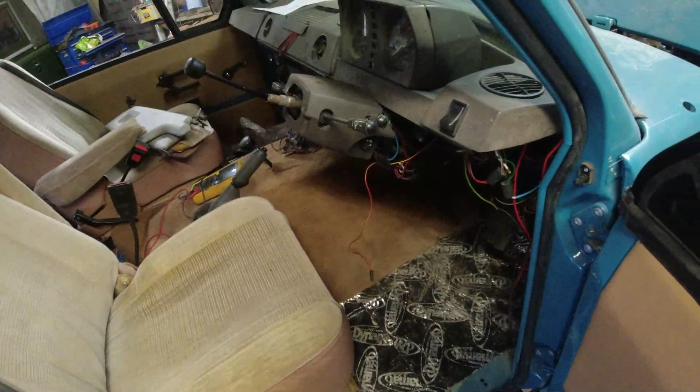Oh my goodness. Right, we've got the interior lights working. Push the plunger in, woo, and they're off and they're on again. And they also operate from the switch down here.

All the wiring around the centre console is now finished. I still need to wire in - which is what that bundle of wires is there - the heated rear window. I can't figure out the park for the rear wiper. I will do, it will happen.

I've just cleared the floor up because we're expecting biblical weather tonight, so I'm just clearing all the cardboard and stuff off the floor because I don't want to come in to a great mess tomorrow.

This is all stuff that's going to go back into Bob, so I'll pop it in Bob for now. Let's pop that over there. Carpets look nice though, good match to the seats. Look alright those. Shame these seats aren't still the gold colour. They'll do if you brush them a little bit. They need a damn good clean. I've got Monster Valet coming. Blue light over there is the USB charger adapter thing.

Yes, my list is shortening and growing at the same time. So we're crossing things off - quite a few things are being crossed off. Still need to do the tailgate seal, it's not working properly. Sill tread plates, usual stuff.

And then, of course, the list grew into this page yesterday and today. I was saying no, that was Monday. I just had to sort the pedal rubbers out for the MOT, I suddenly realised. Fuel tank still not working. Still need to just go through and do the final tune on the engine.

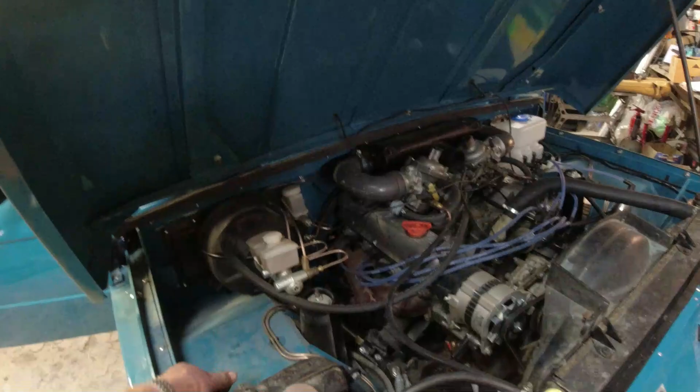It's this phase of the project that is just so massively time consuming. I mean, okay, I've had 3.5 days off this week to do my dad's car, and that was time consuming. Prepping one of these things, I tell you, it's not a small job.

Yes, I've still got to go and polish this thing yet. I haven't polished it yet. I might need to wash it first. Anyway, it's enjoying a bit of solo time in the workshop. My dad's car's coming back in there again tomorrow, so it'll be a bit crowded, which is why I want to try and get some of this interior finished, so there's less crap really around the floor, and the car's in a better state of completeness.

It's Friday again. Bob's being picked up by his owner on Wednesday. Got a little bit of work to do, but not much. My dad's car's coming back, fresh from paint. But we're here to talk about Bob.

So I've got all the rear seats in, I've got all of the dusty - I can't open it because I've locked it. Where's the keys gone? It's not a good start really, is it, Richard? Wrong keys, what an absolute buffoon. Try that again now we've got the keys. What an anus. You can't make this shit up, Richard. You really can't. You're rubbish at this.

Which way? There we are. That way to open it.

So you can see carpet on the rear arches. Look at that, that's nice, isn't it? All fitted in, carpet underneath the rear seats, all tidied up. Still relative chaos in the back of the car here. I've got the original metal sliders and metal channels that go on there.

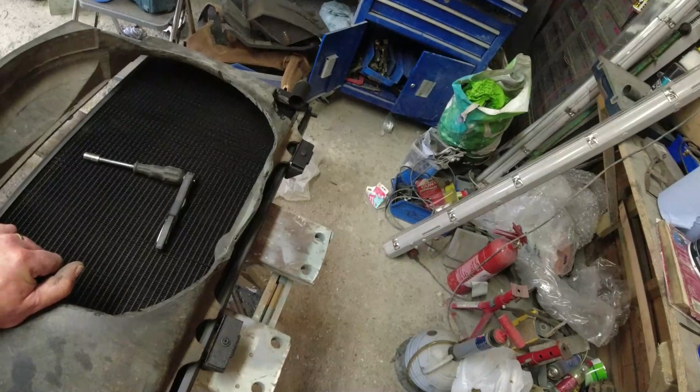And the original radiator, I have been called - Frank over at Viking Radiators has done an absolute sterling job again for me. He's done a couple of radiators for me before on Range Rovers. He did the radiator in Alan, and now he's done the radiator in Bob.

Project names, of course. This is an original metal fan cowl, but it was already broken at the bottom here. This is one that came off Project Red Shed, and the owner rejected that. So what I've basically done is the cowl is largely intact around the sides and around the top, which is really where you want it.

It was broken at the bottom for now, so I've just tidied it up along the bottom edges there, and you can't actually get the fan, the viscous fan, in because it's slightly larger diameter than the metal fan. So I've had to just clear that, and now the fan clears inside here, which is good news.

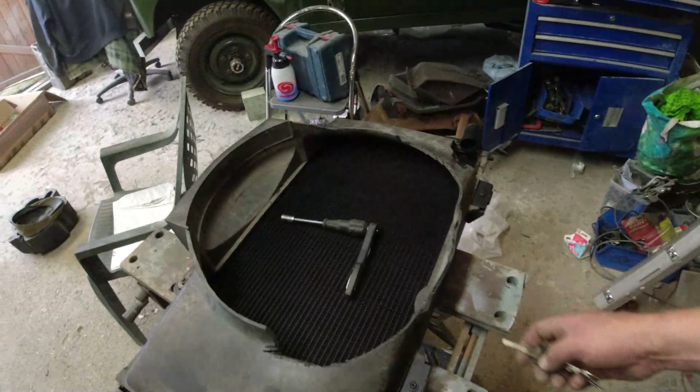Now all I'm going to really do is pop this rad into the motor.

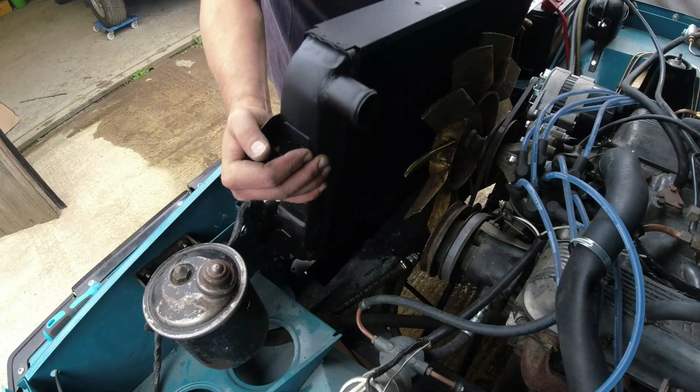It amuses me no end, but I have to edit out profanity as I'm editing the videos. It's not a laborious process editing these videos out, but it does brighten my day up a little bit when I have to edit out extreme profanity. It just makes me giggle. Good Lord, Richard, did you really say that?

Get some satin black up there, aren't I? That's silly, Richard, how I managed that.

That's good, right now, bottom hose. Does it fit? Does it reach? It does reach, it does reach.

Good effort, that. This is the radiator that someone had angle-ground the bottom pipe off, and Frank has welded a stub onto it - well, not welded, soldered a stub onto it at right angles. That appears to have done the trick. Thank you, Frank.

Right, that goes there. Right, let's go and get the cowl.

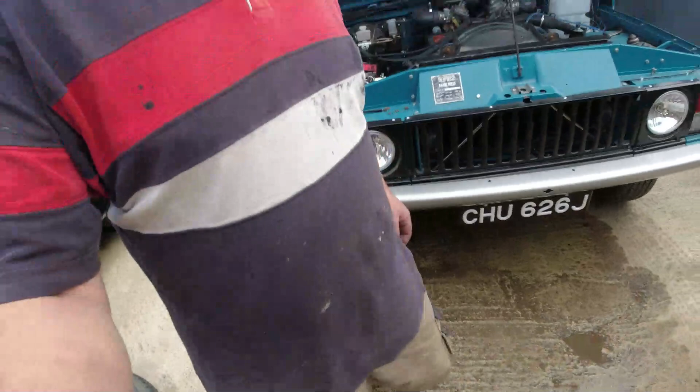So that's there. Right, let me now, I need to go and get the two fixings of this. Here.

I'm going to do that while it's sitting there actually. I'm going to get these two mountings off the top here that go on the top of the radiator. That's what I'm going to do. And then I'll come back to you as I'm putting them on the other radiator.

Let's raise you up a little bit. You raise me up. No, it's not going to happen.

Looking forward to my gin. It is gin o'clock.

Right, that's in there. So what I do is I tighten this onto here.

Just go over with a rattle can, tidy up around the edges. Bit of satin black.

Right, the viscous fan's touching. So what do we need to do here? Probably undo this one here. Let's move that out of the way.

Now, that's good, like that. So what I'll do is tighten this one up. Water's now dripping down the back of my neck.

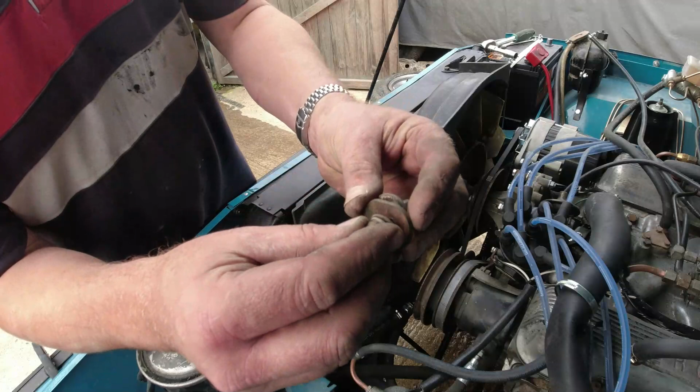That's weird. It's just come unbonded, it's not sheared. I think that might have been fixed at some point.

Right, let's go for a nut and bolt, it's going to be an easy solution. Straight through, nice big fat washer in between. This is how even a 2-minute bloody job can take half an hour. This is what happens, folks, I'm afraid. Pair of washers, pair of splitties, pair of bolts, UNC. Let's take this bastard off as well while we're here.

It's going to get wet in a minute.

It's a massive tool. I need to get a new rad cap for this thing, but this one seems to work, just doesn't look very pretty. Trouble is, the new one will be Chinesium, and this one will be kind of used old, very used old.

So I'll clean up the top with a bit of steel wool, it'll probably come up beautifully. Bit of steel wool.

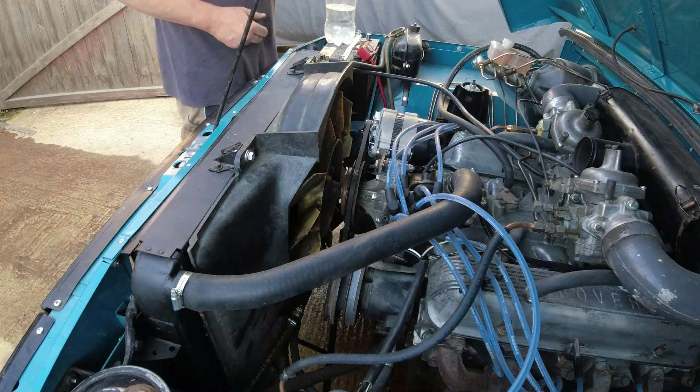Might be inclined to keep it actually. It's quite sweet that, certainly not going to get chucked in the bin. There we are, very nice. Patina - you can't put a price on it.

Right then, keys, let's start up. Connect the battery.

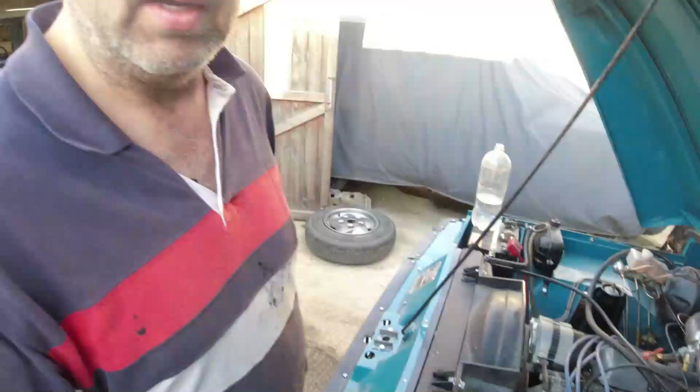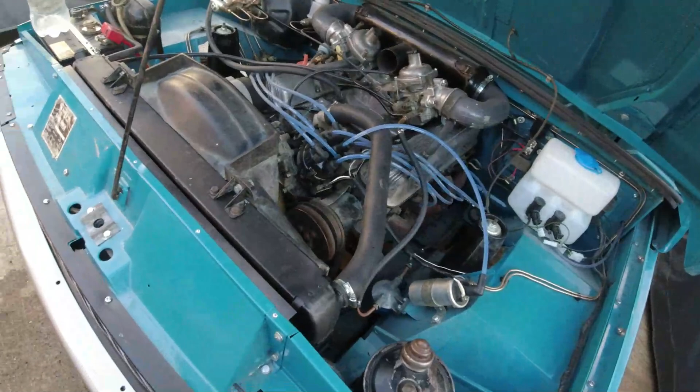Oh well, that's delighted me, misfire's back. That's good, that's good. I think I'm going to change plugs, actually. I'm not going to grab hold of these leads just yet. I'll put some coolant in there.

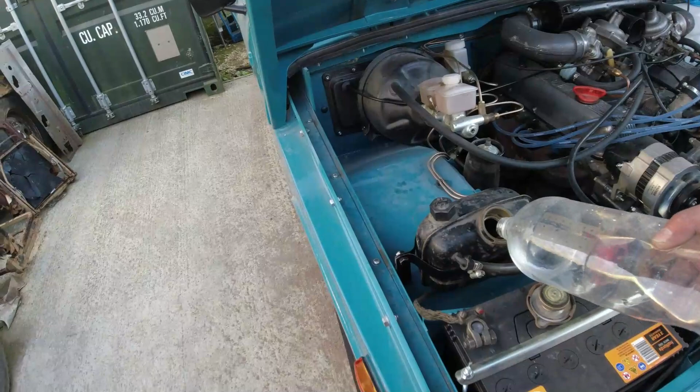That's in there. Right, let's go on. Let me turn off and just double check these two leads.

Like I said, I walked back towards the car and it's running beautiful. Yeah, front cylinder's now firing. I'm going to change the plugs on the front - I'm actually going to change all the plugs. That's now working. I think the plugs are the wrong spec.

Sunday, not hungover. Right, I'm going to try and get to the bottom of this misfire issue. So, yeah, let's just walk through what I've been doing.

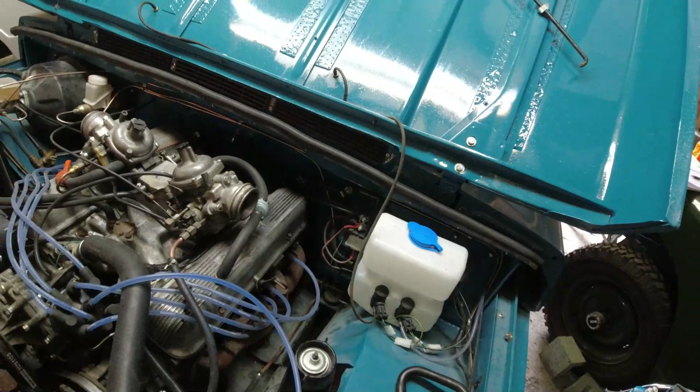In a nutshell, I've had all the plugs out, double-checked all the gaps on all the plugs. They are NGK BP6ESs, which is actually quite an old plug. So I've ordered a set of new plugs because I'm not convinced it isn't a plug issue.

Now, what I did notice was that yesterday when we had the misfire, the two front cylinders on each side were causing me difficulty, so I double-checked the carburetor distribution. As I understand it, each carburetor deals with the middle two cylinders on each side and the outside two cylinders on the opposing side. Which would make sense because this carburetor is dealing with these two and then it's got these branches going out to the outer two, and vice versa.

Some of the plugs were wet, some were coked up, and some were beautiful. So it's almost as if - I don't think it's leads. I've been through and double checked all the leads as you've seen in the previous video or earlier in this video. I'm losing track of my life.

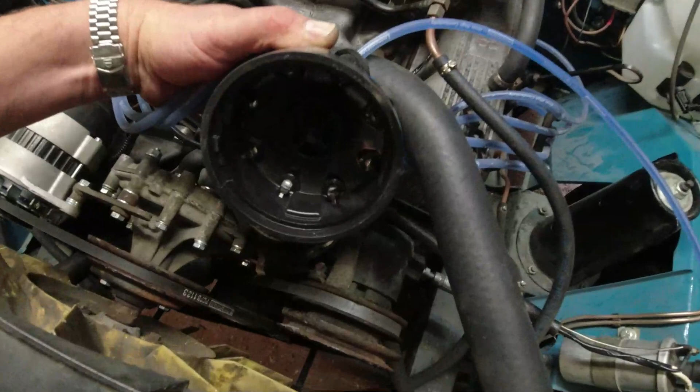Pretty sure it's not the distributor cap. I mean, the main thing we've got here is, there is some arcing going on in there. It's not the best, is it? This is a new cap and rotor as well.

Oh, that's odd. Right, a bit more investigation in here, I think. Let's turn you round.

Right, okay, so let's pull these leads off. I've got the screws to go in there. Now, the centre pin is good, but the problem I've got here is... oh, come along. There it comes.

Sometimes these rotors cause problems. This one, I think what I've actually just done here is I've lifted this off. It's actually quite a common fault, this, so it's probably worthwhile explaining what happens. When you lift the rotor up, what actually happens is you disconnect the mechanical advance, which is exactly what I've just done here.

So I'm kind of at a loss now. But here you can see on the tip of the rotor, I've got some burning, and on the inside of the cap there's quite a lot of carbon in here. I don't know why. That's weird, isn't it? Maybe it's not the plugs. Maybe I'm talking a load of bollocks.

Right, let's take you off there. Take you off there. Push you. Oh, for heaven's sake, what are you doing, Richard? I don't know what I'm doing. Anyone know what I'm doing? Can anyone help me with what I'm doing?

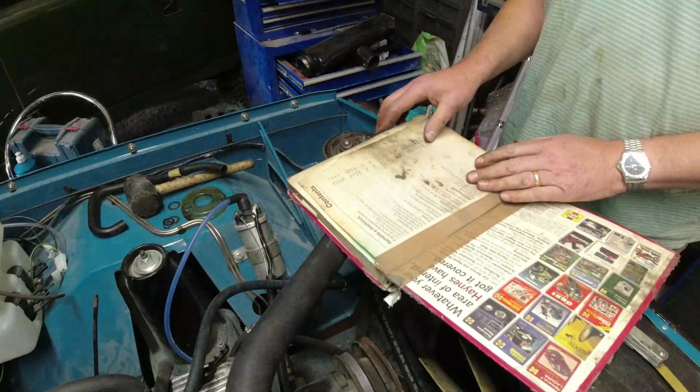And then I'll check the air gap. Now the air gap is actually defined in the manual, believe it or not. I think it is anyway, I've seen it somewhere. The Haynes Pack of Lies, chapter 13. 13 index, probably where that tab is there, isn't it? It is, okay, look at that.

Ignition. Conventional electronic ignition. Does it give me air gap? Pick up air gap. So 8 to 14 thou. That's 10 thou, okay.

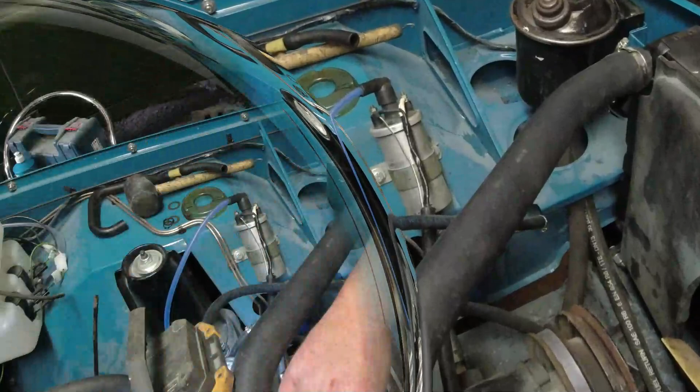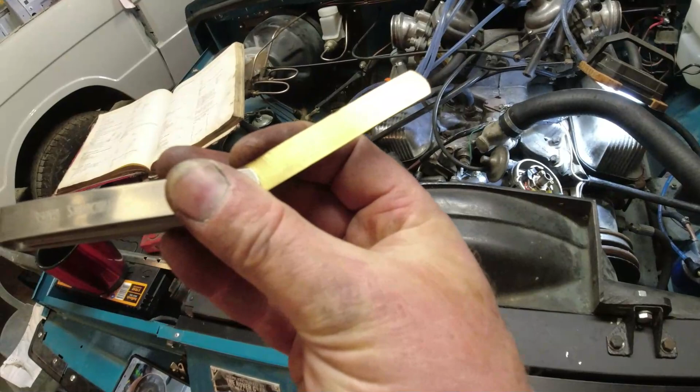So what I'm actually doing is I'm measuring between the tooth. Can you see? You can. Measuring between the tooth there and the pickup, and that's what I'm measuring in between. This goes in now, it didn't go in before. It now goes in. And that's a 10 thou, 0.25mm non-ferrous feeler gauge.

Pop that back over here. They're not for now, I picked them up earlier on. I'm driving home today and I'm going to be drinking them when I get home on a Sunday.

Right, having done that, again, I'm not happy with that, but tough. Right, let's see what happens next.

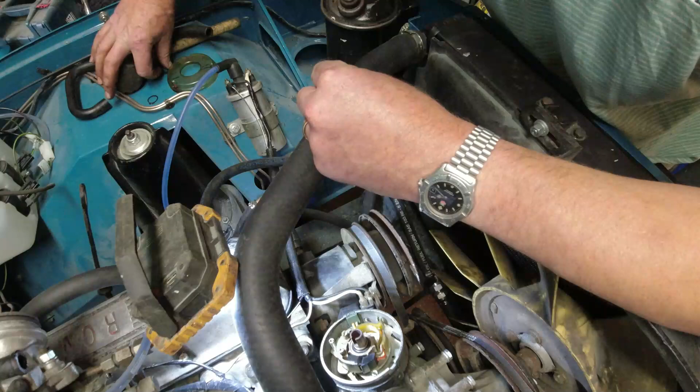So big old O-ring goes back over the top. And then I've got these 2 shims, one's a washer, one's a shim. Probably both shims. That goes on. That goes on. Bloody great big clip.

This is not a factory one, this one. This is a reproduction, whatever it is, because the factory one, the holes are far too small for my... bloody great big... I don't even know what I'm talking about anymore. Whatever these are, circlip pliers.

Has that actually gone into the groove? That's gone into the groove. Yes, it has gone into the groove. It's certainly down. I don't want this stuff flailing around, you see, if in the event that this clip comes out, stuff starts flailing around inside the distributor. It's going to be held in place by the rotor, but it's not going to make it very reliable, is it? Yes, it's definitely in the slot, I can feel it. Okay, so that's in the slot.

That's good. Then we put this base plate, and the words are, do not remove this cover. The distributor is factory set and requires no adjustment in service. Well, I'll tell you what, it fucking does. Air gap set, mechanical advance fixed.

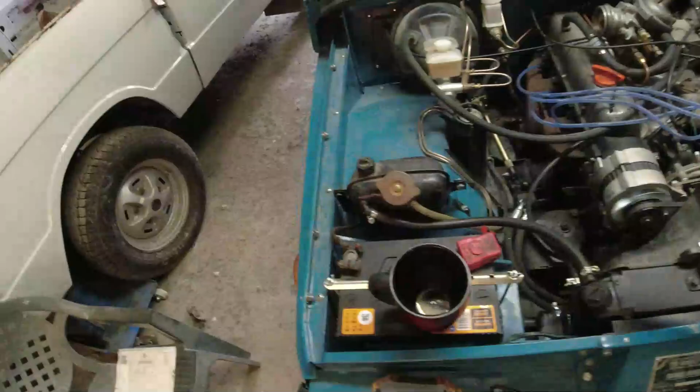When I pulled the plugs out of the injector, I put number 1 plug in number 7, I swapped them all around. Now the problem I've got is number 7 is not firing. The others are all firing. So 1 is working, 3 is working, 5 is working, 7 is not. I did exactly the same over here. Good job I've got these new plugs coming tomorrow.

2, 4, 6, 8's not working. Actually, 2... they're all sort of working on this side. I'm wondering if this is right.

So next thing I'm going to do is warm this thing through, and I'm going to give it a double check on the tune of the carburetors.

Bear in mind that was a cold start. Also good. Right, on with the screwdriver next. What basically it's doing now is lifting up the dashpot inside the carburetor. Just lift it the width, put that underneath the dashpot and turn it that way. That gives you enough of a lift. Basically, I want the revs just to drop very, very slightly, for the engine not to stall.

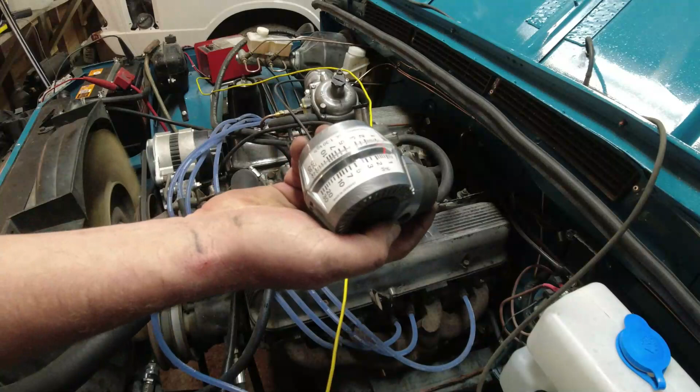I'm not changing any of that. That's good. Ow! Bonnet, not very friendly. Right, so start up again, and we'll just double check the airflow. Not a lot wrong with that, is there?

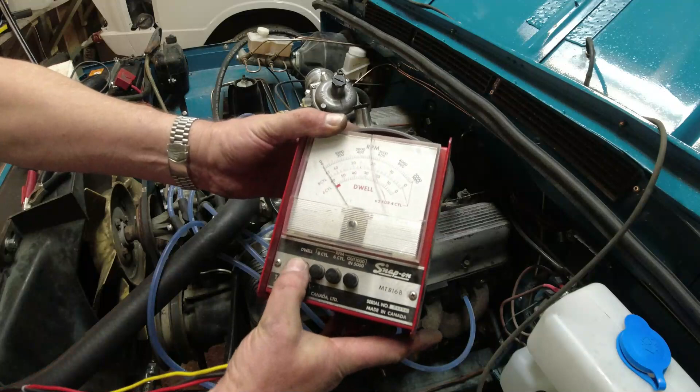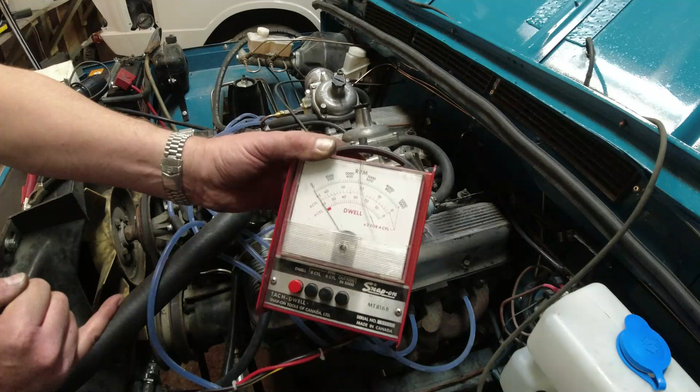Let's take this out, put this back in the container. Just in case you were wondering, this is my delightful box of tach-dwells. You set the dwell using that and 8 cylinders, okay, and then you've got the RPM. It's got a big scale and a small scale, so you can fine tune. Basically that will work on the big scale, the 5,000 scale, and then that will work on the 1,000 scale. I use this to set, when I've got points distributors, I use that to set the dwell as well. Very nice bit of kit, I picked it up off eBay for about 20 quid.

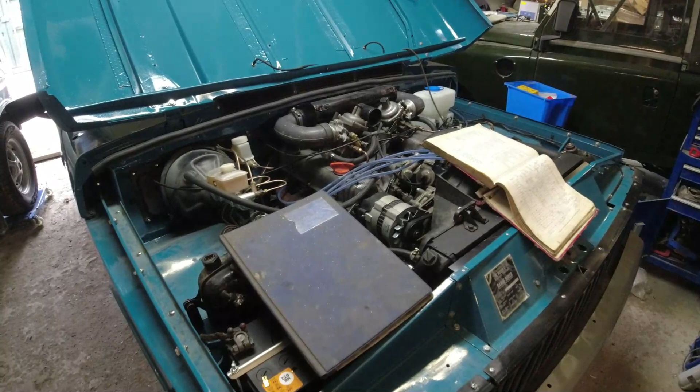Right, it's all back together again. I've had an interesting afternoon diagnosing some little electrical issues, things that aren't working. One of the things not working is the handbrake warning light. I'm pointing at the pressure warning switch, the differential switch, whatever it's called, the shuttle valve for the brake switch. Because you've got dual circuit brakes here, that switch sits in between the two circuits. It doesn't interfere with those circuits, but if the pressure disappears on one of those circuits, the shuttle will move, short out the cable, and light up the light on the dashboard. So that's the way that works.

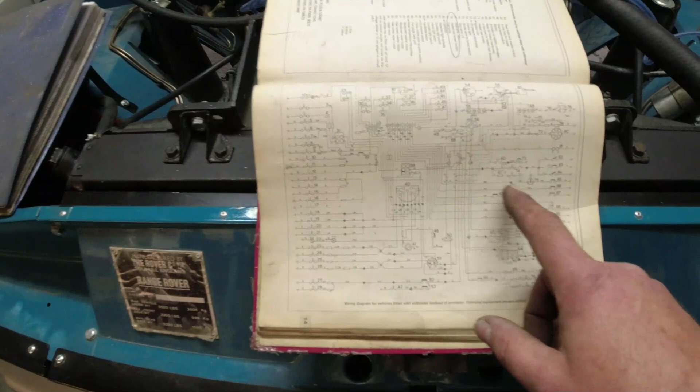Now, that little bastard is right there. Look at that, that little fella there. It's got basically 2 pins on the outside, which the 2 black and white wires go to, and then it earths through the handbrake warning switch. But it also earths through the switch. Check the switch. Switch works fine.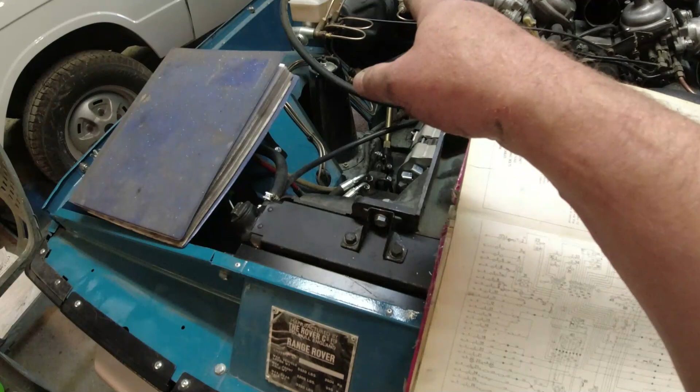Okay, check the cables. Cables work fine. Check the continuity for the big connector that's on the bulkhead up here. Works fine. Right, okay, let's just trace the black and white wire back.

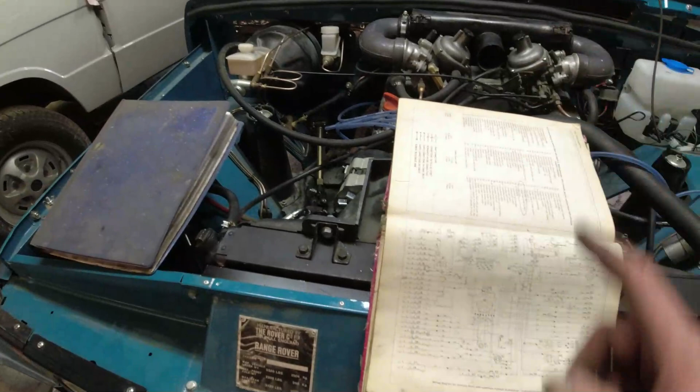Oh, it goes to the back of the instrument pod. So I need to get the instrument pod off anyway because the illumination lights aren't working on it. So I'll get that sorted out.

Then I started faffing around with an inline fuse by the fuse box. I can't be bothered to go around there and show you now, but it's a brown and white wire. I could spend all day going through the brown and white.

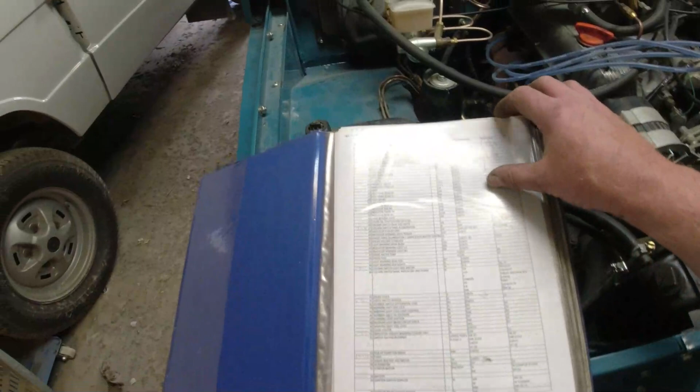So what I've done, years ago, I created a reference for every single circuit, what the source and destination was. Here we go, so we go down here and look for the source, brown and white. NW is what we're looking for.

Oh, there's one, pickup point for the radio. Let's go and have a quick look. Pickup point for the radio. Well, there's the pickup point for the radio there.

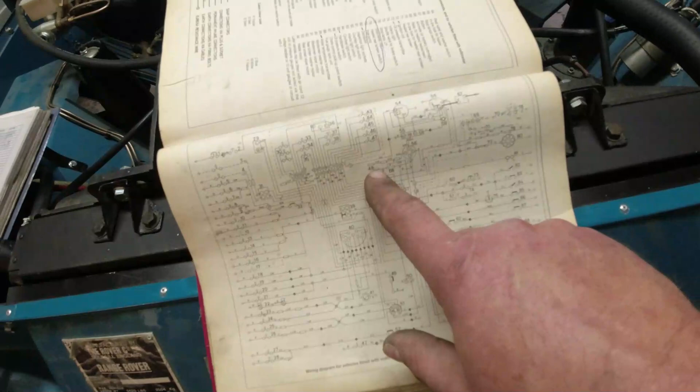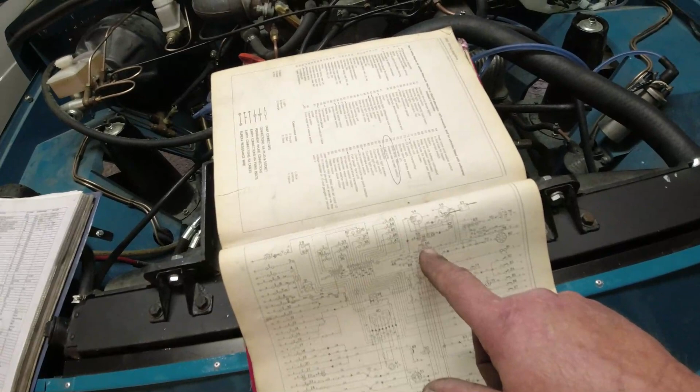Oh, but hang about a second. It branches off and goes into 68, which is ammeter, voltmeter, but also, what was the other thing it went into? 56, which is the ignition starter switch.

So I'm thinking, well, this is a bit odd. I don't understand it. Why have I got an inline fuse for those? So then I go back to the correct diagram.

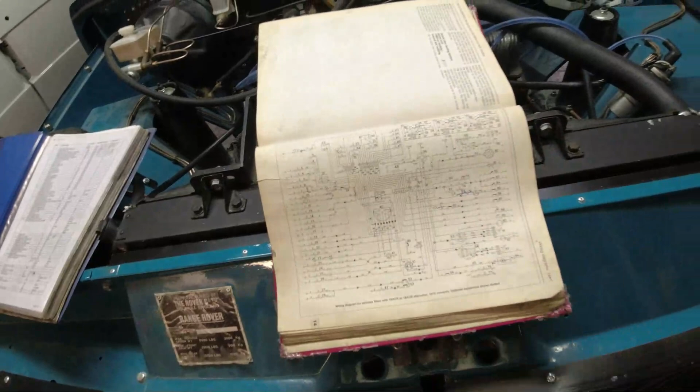What I've got on this, that's the pickup point for the radio, 48, which is listed on here, 48, pickup point for radio. But the heater's on this circuit as well.

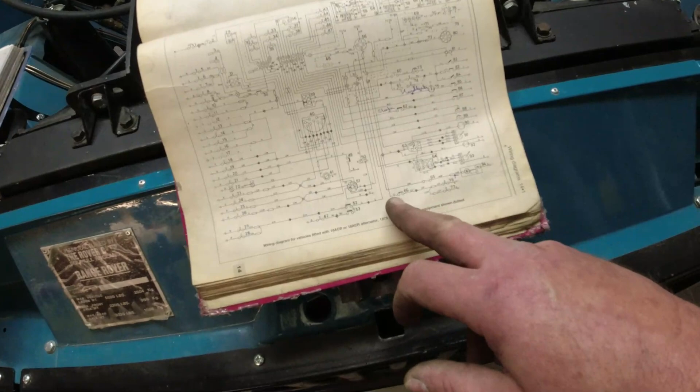So I can see this brown and white wire comes all the way down here. There we are, brown and white, 65, inline fuse for heater. There we are, inline fuse for heater. And then just after 65 is the heater unit.

There we are. So pull the fuse, heater doesn't work. Put the fuse back in, heater works. So there you go, I found out what that inline fuse is for.

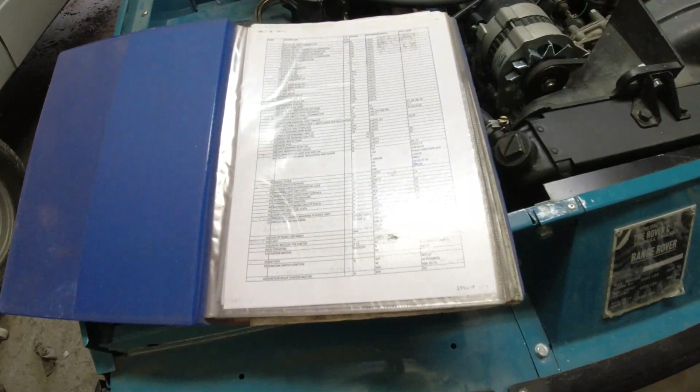I probably would have remembered, but my book's fallen apart. This thing is quite useful when you find a wire and just cannot work out what the hell it is. If it's got a voltage to it when the ignition's on, then I go down the source side. If it hasn't got any voltage, then I go down the destination, and it gives me an indication of what it's involved in. That's my useful little thing there.

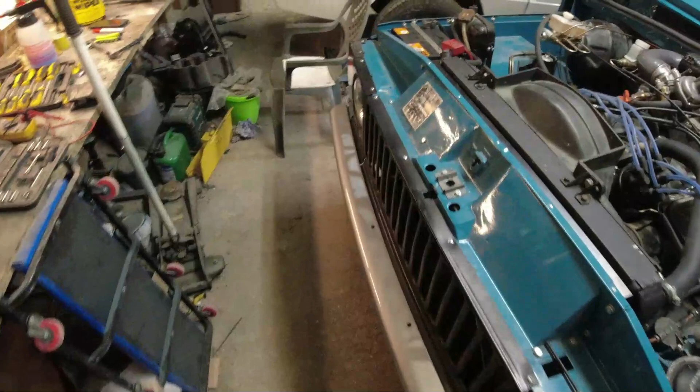Right, so we're done with all of that. I'll put it all back together again. Let's just see whether we actually start. We've got the battery on, we've got the keys in. Oh, blower's on still, let me just turn the blower off. There we are, blower's off.

Ready? You see I've got the fuel warning, low fuel warning light working, and the fuel gauge is working now as well.

The letters fallen off the inside, so that's like a lowercase L, a U. The E is dropped right down to the bottom here, and there's the other L. I might have to see if I can make that a bit better, it's not very pretty as it is.

Cubby box went in as well, look at that. Let's put the interior lights on. Oh, there we go, interior lights are on. Woohoo! And then what I'll do also is I'll put the lights on.

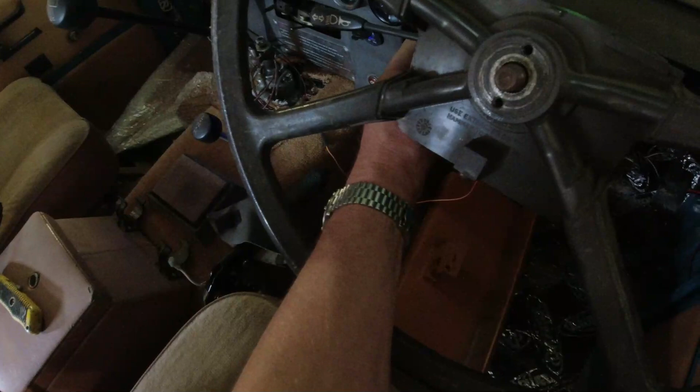There's the lights on. Flick the panel lights on. Turn the interior lights up. Right, so we know we've got panel lights, but there's no panel lights in here at all. There's nothing. All the other panel lights are working, so the voltmeter's working, the oil pressure gauge is working. Can you see? Camera's not pointing at anything.

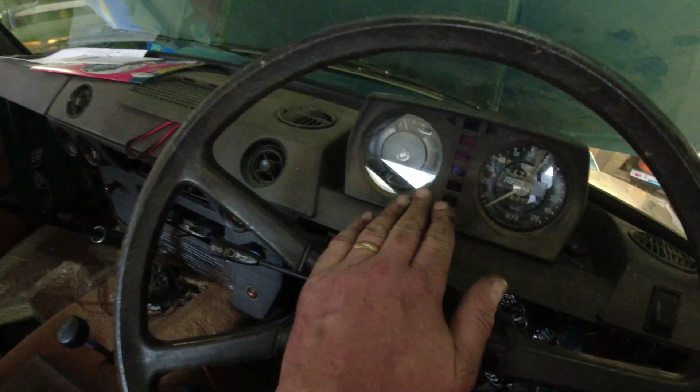So I could see that these lights are all working along here when I activate the switch on the side here, but I've got no lights up on the pod up here, which is likely to be the connector on the back of it. So I'm going to need to take all that apart.

And the other thing that's flummoxing me, perplexing me - let's just turn this thing off for a minute. The other thing that's perplexing me is the park for the rear wiper has stopped working. Oh, good. Fucking thing. I'll have to take it apart and investigate. Until then, probably need to concentrate on other bits and bobs.

And that broke off the handbrake sensor. Bastard thing. So it's going to stay up there until I get a chance to do it.

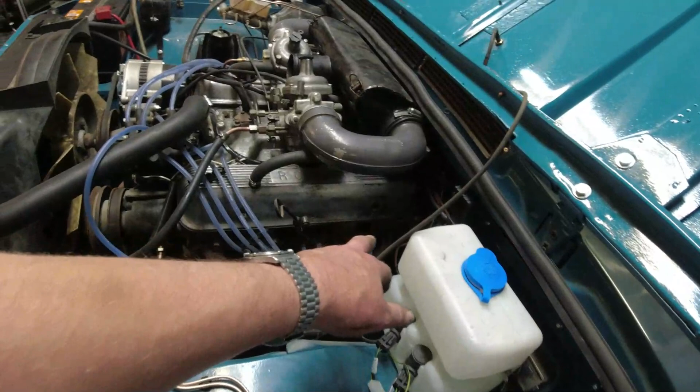But for now, the misfire has gone, but I'm going to replace the plug because I'm fairly sure that's causing the problem here. Because certainly on this bank here, the problem with the cylinder not working followed the plug, not the lead or anything, or the cylinder or anything else. I followed the plug because I moved plug 1 to plug 7, and plugs 5 and 3 I just swapped over, and the problem went from cylinder 1 to cylinder 7. So it's a nice easy piece of diagnosis there. I'll replace all the plugs.

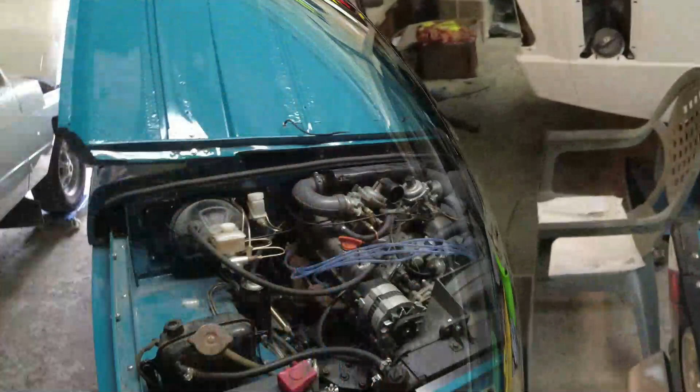New plugs are in. Let's do a start and see if it makes a difference. So now you can look at the engine. I'm going to go and see if it makes a difference. Does it make a difference? What am I going to do? So I'm going to get the keys first. Neutral. The battery. Donkey. I'm good at this, I tell you.

That's immediately a world better. I can only assume that these BP5ES plugs were not compatible with the RN9YCC that should be in it. I'll double check that in a minute. But that started quite sweet, didn't it?

Let's see if indicators work now. Put the key in. Oh, we got indicators. Let's check the function. And they do. Great.